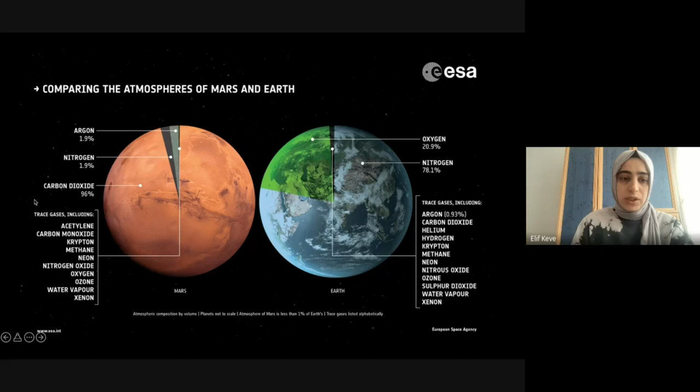As you can see, on Earth we don't have fully oxygen; the highest percentage is nitrogen, and oxygen is only 20%. Carbon dioxide on Earth is among the trace gases, along with other trace gases included in the breath we are taking. When we look at Mars, the highest percentage is carbon dioxide, and there is also nitrogen but in a smaller proportion. Argon is very similar to Earth. So the MOXIE project is about converting that carbon dioxide percentage into oxygen.

You know about the Perseverance rover, sent to Mars in 2020 and landed in 2021. It traveled on Mars to investigate the ground and materials, and research the existing ice and water. With this rover, there are two important parts: one is Ingenuity, the first flight on Mars, and the second is MOXIE, which we will talk about now.

MOXIE is the one that will work like a tree on Mars.

But here at the first landing to Mars with the MOXIE and Ingenuity, the MOXIE size is extremely small because it's kind of a test of this machine, to see if it works or not.

So what is MOXIE actually? MOXIE is an abbreviation of Mars Oxygen ISRU Experiment. ISRU is In Situ Resource Utilization. In dictionary description it says the ability to face difficulty with spirit and courage. MOXIE is a short, snappy name for a tool that helps lead to human footprint on Mars. It helps humans explore Mars by making oxygen. It works in situ, in place on the red planet, and is an experiment.

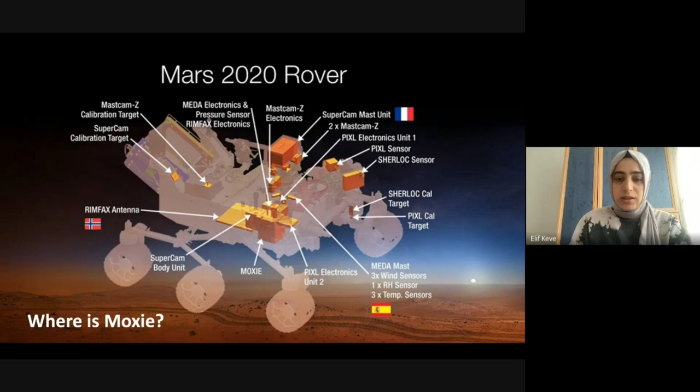I want to open up the details of the machine and show how it works, what kind of parts are included in it.

What are other duties of MOXIE? MOXIE is the smallest scale actually for now. It will be designed bigger for the next missions, and it will make more benefit on Mars. It is ingesting carbon dioxide from the atmosphere and producing propellant grade oxygen. MOXIE will make 6-10 grams of oxygen per hour, like a small tree, or about 50% of what you breathe.

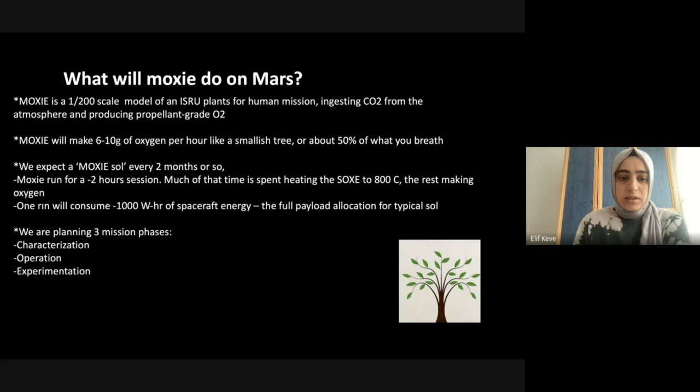Now coming into this machine, we have two very important parts that I will give detail about: the SOXE and the scroll pump, located in the sensor panel.

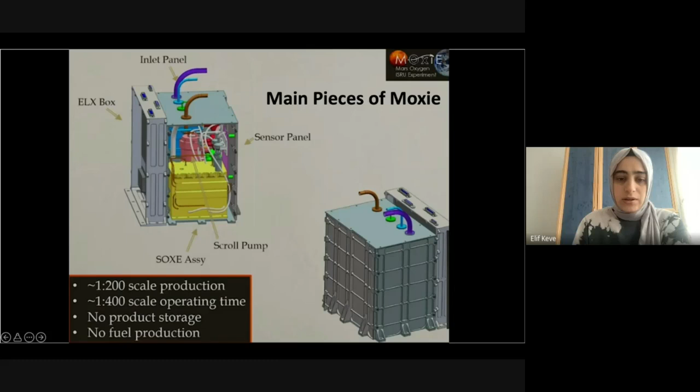As you can see here, this yellow box is SOXE, which is the entirety of it. And the pinkish color here is the scroll pump that is taking air from outside to inside for changing it. At the exterior view, it is spaced inside with two inlets for the outcome, and this part is taking the air inside. The scroll pump is placed here, and they are placed next to each other.

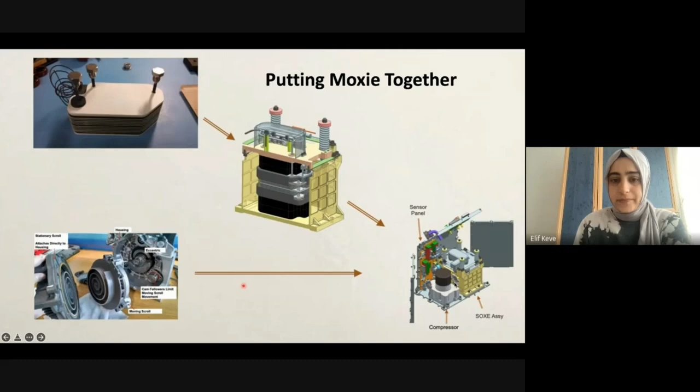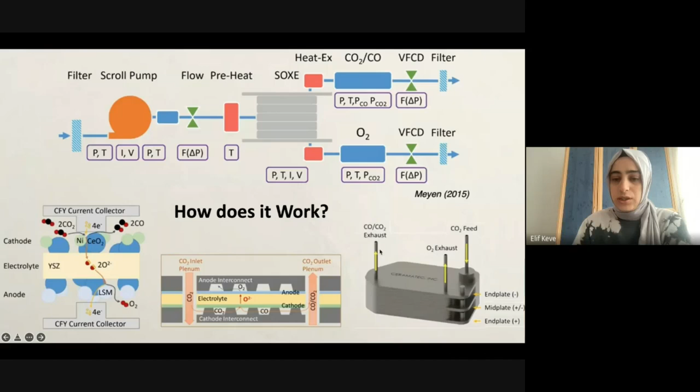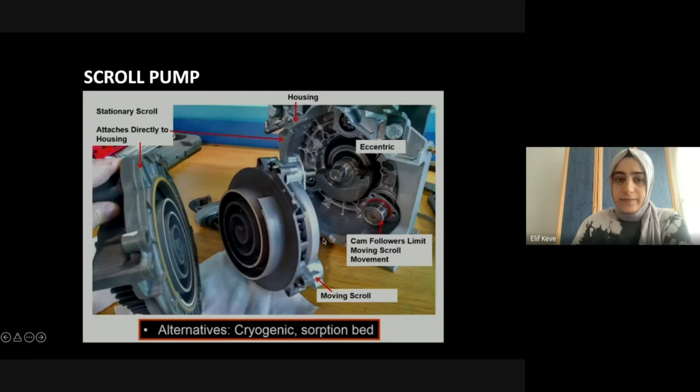Maybe this can show the simplest way how it works. There is a housing part here holding this piece, and a part that moves, a scroll that moves to take the air inside. This is the simplest way carbon dioxide in the air is taken inside to be divided into carbon monoxide and oxygen.

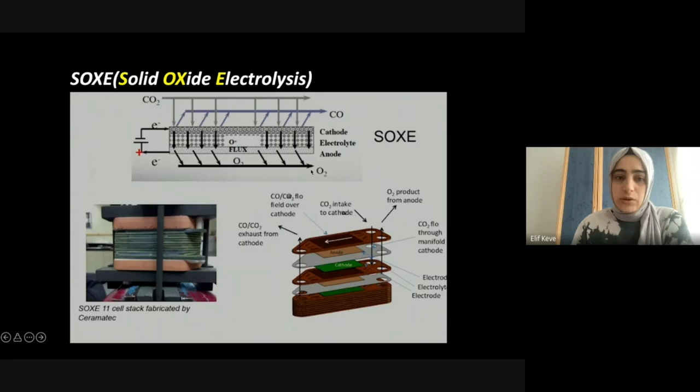And the simplest reaction is shown here. However, if it works like this, the benefit is usually half, because of the chemical reaction. When you take carbon dioxide, it will produce half the benefit in oxygen, unfortunately.

But the next project is the same concept, but the size of it is extremely different, scaled up. So the benefit given by the Mars 2020 project will be a kind of demo of the real size of the MOXIE. With this new scaled MOXIE, we are going to get more benefit, like a small forest rather than a tree.

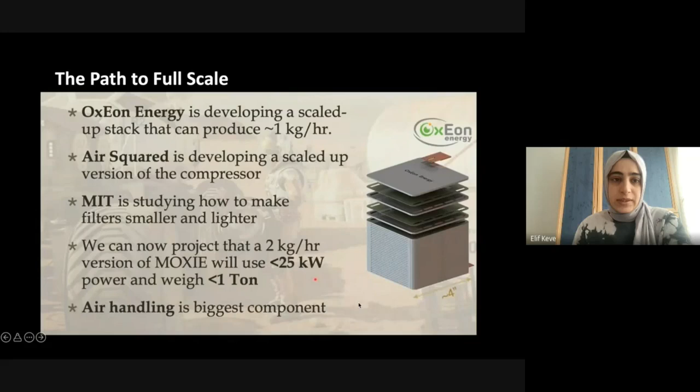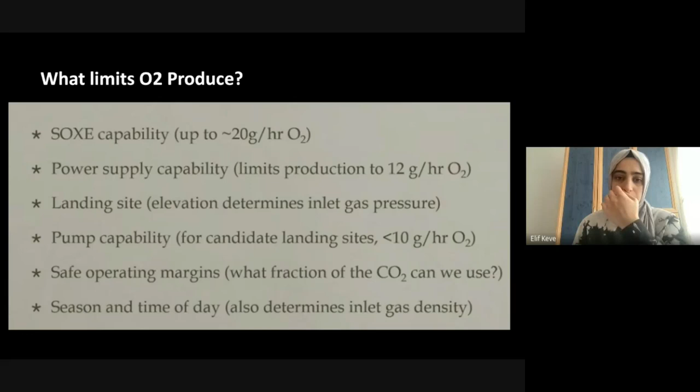There are some limits on oxygen production, because it's not possible to use all the energy of the machine only for fully producing oxygen. There are also inherent capability limits. SOXE capability is up to 20 grams per hour of oxygen it can produce.

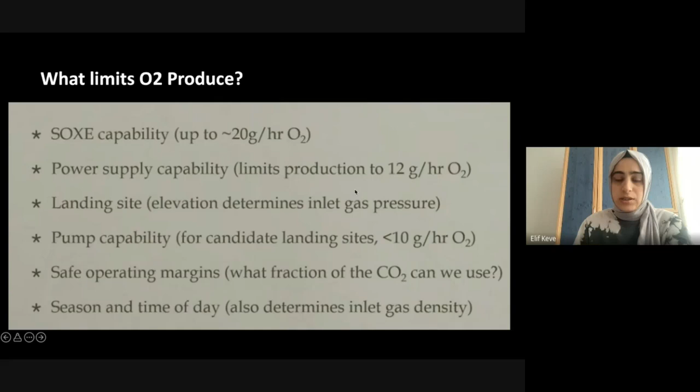Power supply capability is also one of the different factors involved. And here it explains the differences over time, because the machine works differently in summer nights versus summer mornings, and according to different seasons or temperatures.

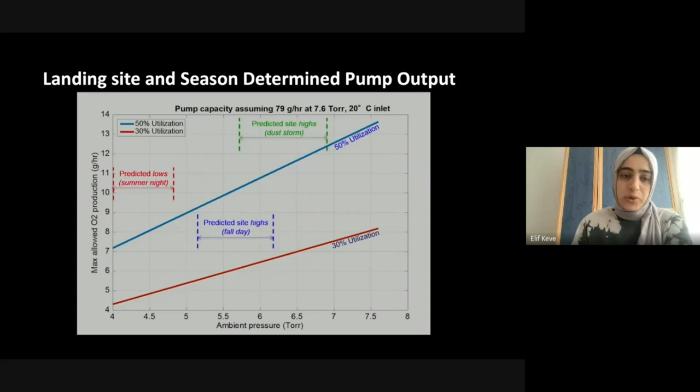I would like to give some examples of space architecture projects after this. So we are learning how we will go to the moon first with the Artemis project, to make it the first and highest analog area to simulate life in outer space. Then after Artemis 2, we will land on Mars. And what we have to solve is oxygen, to return and to breathe.

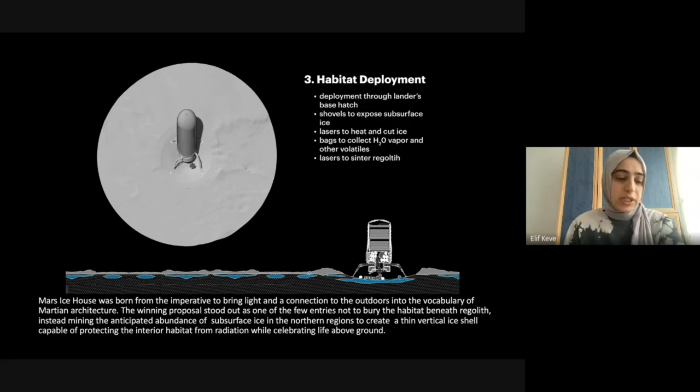As you can see in this small demo and animation, firstly there will be a descent and landing to the ground, and the habitat will be deployed.

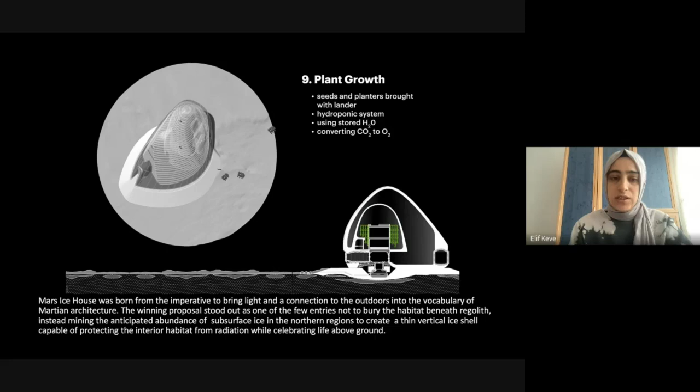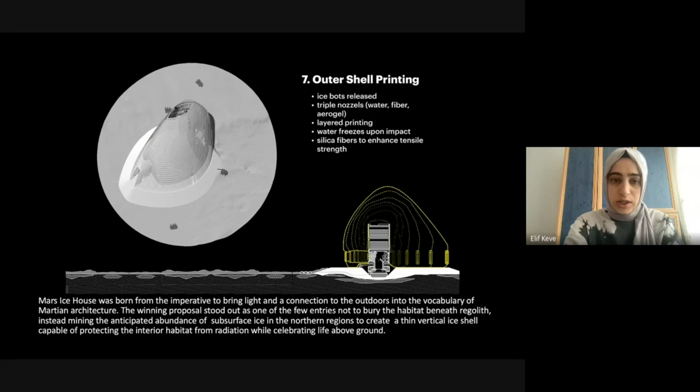Then, as the exterior shell and interior shell are made of ice and ETFE translucent material, it should find H2O, which is water, ice, underground. So there are different machines working on the construction of this building. One of them is very important for this part: finding ice and water underground.

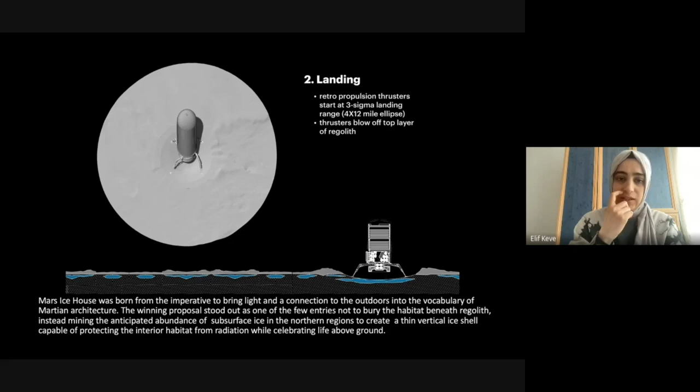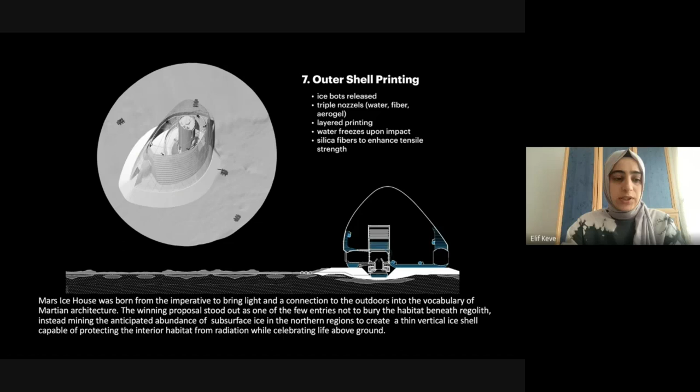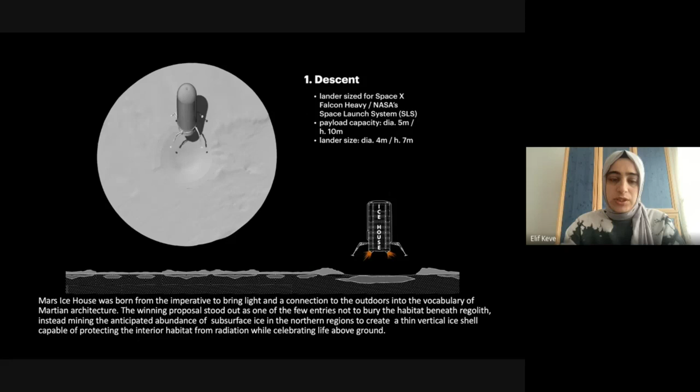I will give more details about these machine robots, how they work, what they do. Finally, after having the source of ice and water, the foundation will be sintered, and ETFE membranes will be inflated. The second important robot is for printing the shell, the outer shell and inner shell as well.

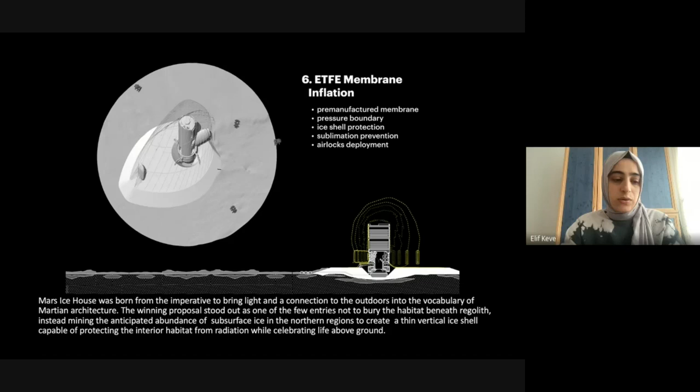And then the plants are growing. If the plants grow very well, it shows that life will be possible here, so a human can be ready to arrive at the place. After the plants' growth, the crew will arrive.

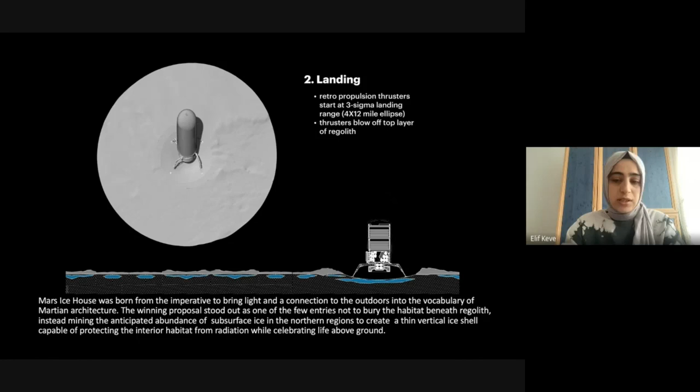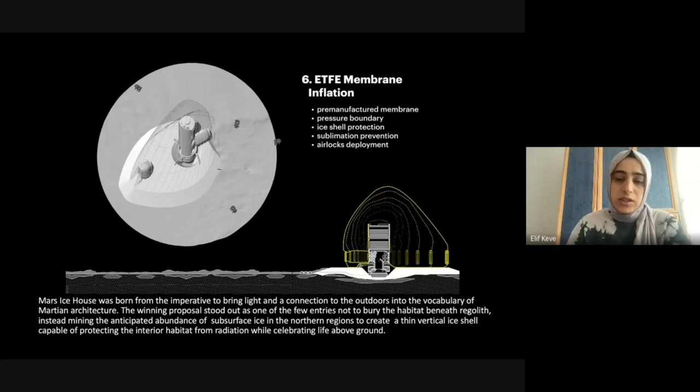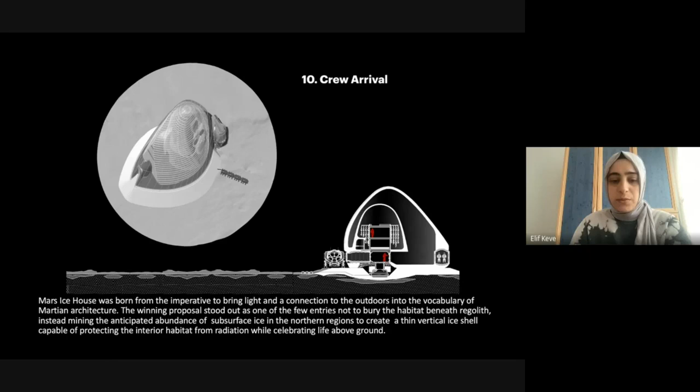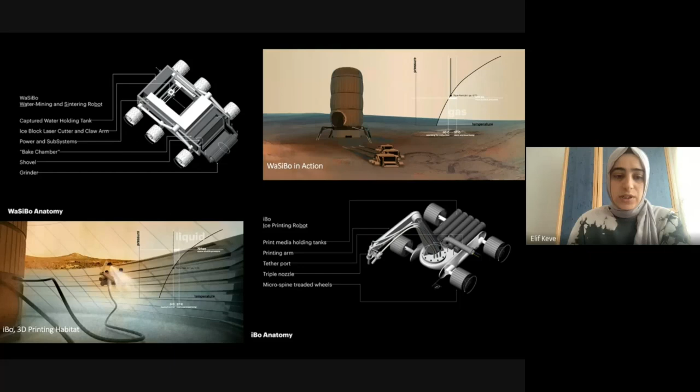WaSiBo is the machine that will first research places with water and ice, which will be used in this construction of the first habitat. iBo is the 3D printing machine that will be used for the exterior and interior, shown here in a small picture.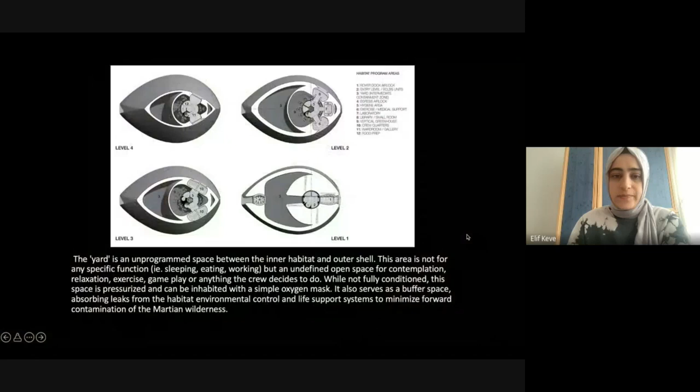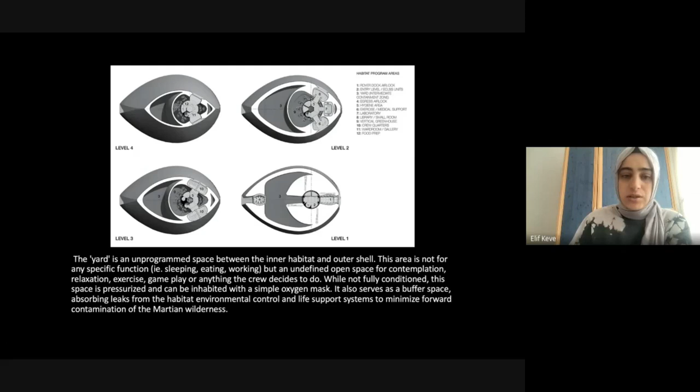Here you can see better how it works. It's climbing and 3D printing the interior and exterior, because this project is double shielded. Due to this double shielding, the exterior part, the yard, is partially protected, but the interior part is extremely protected from all hazards, radiation, and other dangers.

Another important point is this part, the airlock. We have to have airlocks at every project. That is a crucial, very significant point we have to think about, because it will protect humans from passing outside to inside.

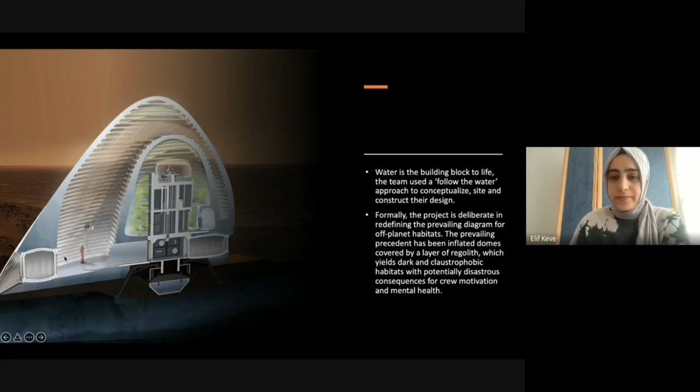The second important project of the SEArch+ group is Mars X House. Mars X House has two different versions, version 1 and version 2. First I want to talk about version 1. This is one of the prize winners of NASA's Phase 3 Habitat Challenge, and in this project there are two different parts that are actually connected to each other.

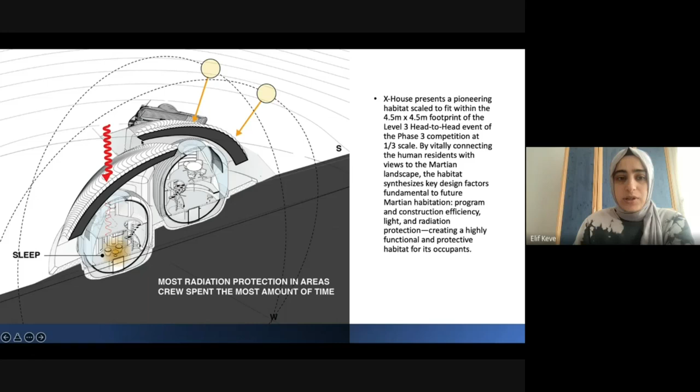In this project, the concept is about how to bring in horizontal light, but not direct light, because the direct vertical sun rays are very dangerous for humans. That's why they are making small openings to take horizontal light inside.

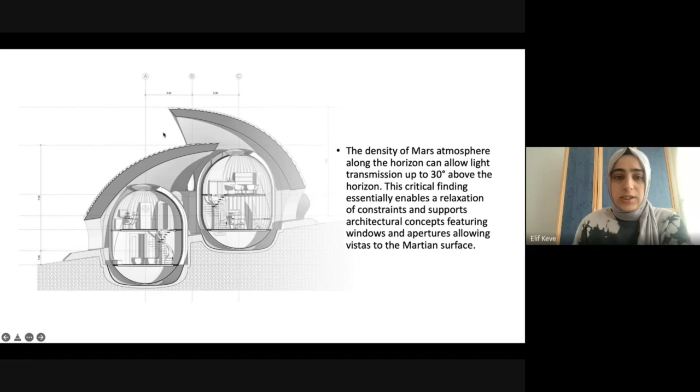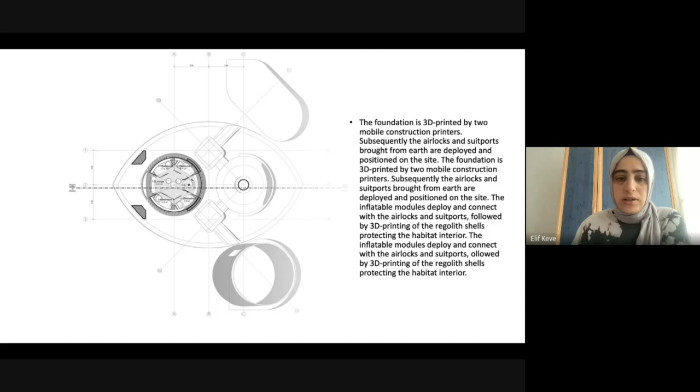They made this opening by creating two parts with two levels, so in this case they can cover both of them while taking horizontal light inside. As you can see here, the two parts are connected to each other, with all needed parts.

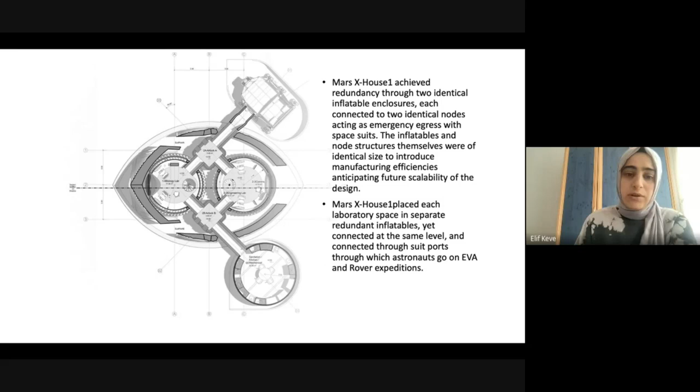Looking at the plans of the Mars or Moon projects, there are some small differences from life on Earth. They are extremely focused on how to live in small spaces and how to make them larger through multi-use and flexible usage. They also care about gym and sport areas, and each house has its own plant growth section to make a sustainable living.

Version 2 is also named Mars X House. It is one of the first prizes of NASA Phase 3 again, the 3D printing habitat competition in 2018 and 2019.

In this project as well, as I said, before humans arrive, all the robotics will construct this building. With this shape, they're mostly addressing the concept of protecting from exterior winds and outside forces, because Mars has high winds that can damage structures.

Yesterday one of our friends asked how high we can go. I will explain more about this at the next project, but here too they are trying to make the highest construction possible.

Here, making it curved, as I said, makes it resistant to exterior forces, and all the loads are included in this part. This part is storage for water, and it's heavy. So you can think of two curved parts with the pressure of the high mass on top, which makes the project strong enough to survive longer.

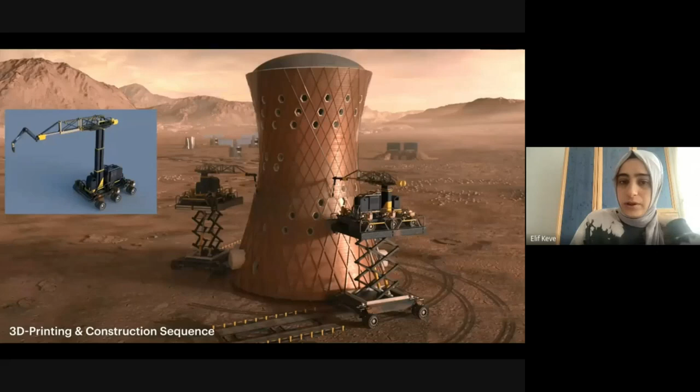The nice part here is the openings, which take biomimicry from the bee cells of honeycombs. The hexagonal shape is one of the perfect shapes that can make the biggest surface with the lowest edges. You can see a small animation of how the levels are constructed and what the steps are.

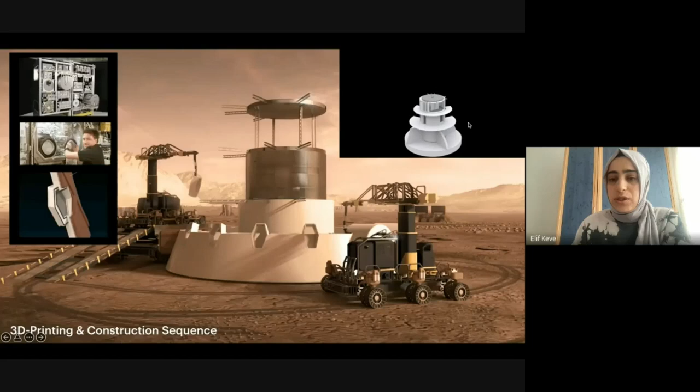Initially, after the foundation is constructed, the construction parts will be placed and 3D printing machines will print the rooms, divisions, and levels.

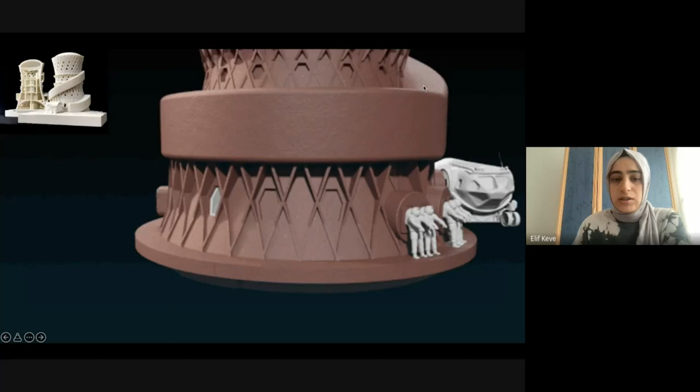After seeing the interior construction, you can see outside details here. As you can see, they have different levels from the exterior to interior. Regolith concrete covers the exterior, however the regolith, the material of Mars, is toxic material.

It's not very healthy for humans to touch this ground; it contains toxic material for human skin. That's why they usually cover it with different interior shells. Also, for making it strong, basalt fiber is used, so it's double shelled inside for protecting humans from the toxic regolith concrete.

The base is made of HDPE material, and finally the window is a piece of assembly made using a hexagon super shape.

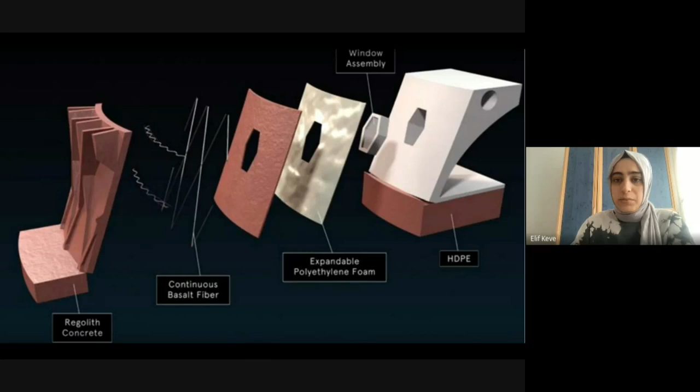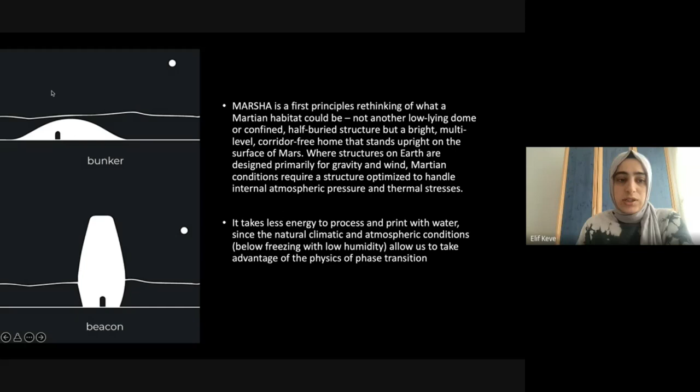MARSHA, that is the project I wanted to talk about. The concept is the answer to our friend's question from yesterday: how we can make the living habitable area higher than the normal concept, which is always used to make small domes to protect from radiation by going underground. These were the initial project ideas, but this new concept comes up against that first concept.

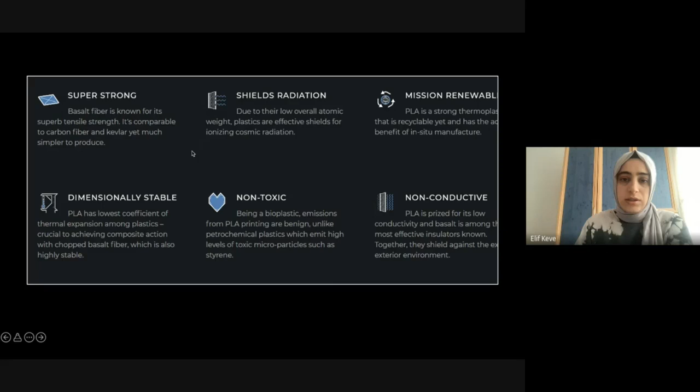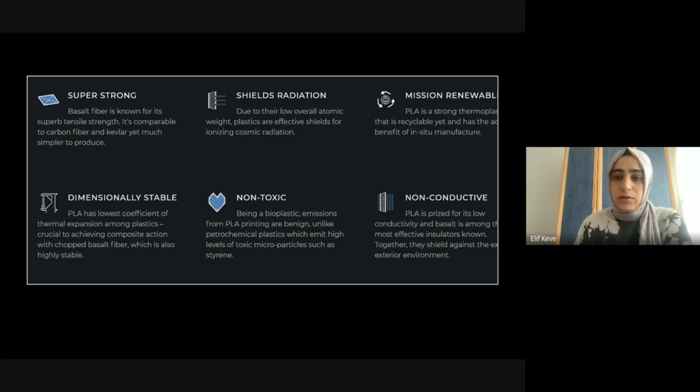This structure, this building, has different very important features. It is super strong and shields radiation. It's also double shielded, double coverage - in any case we have to protect humans from the toxic regolith of Mars. And it is renewable, and as seen here, no toxic material is included.

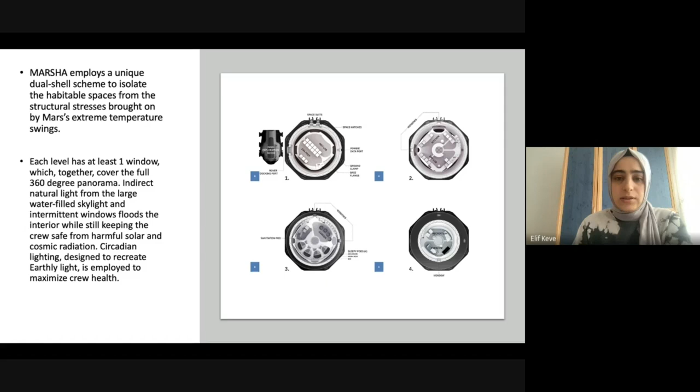We can see some design and planning details here, some renderings. Mars Incubator is one extremely different project from the previous one - all 3D printed habitats. These are extremely different than the others. As I said, they combine with each other in the space by these corner connections, so it includes a lot of hexagons and pentagons.

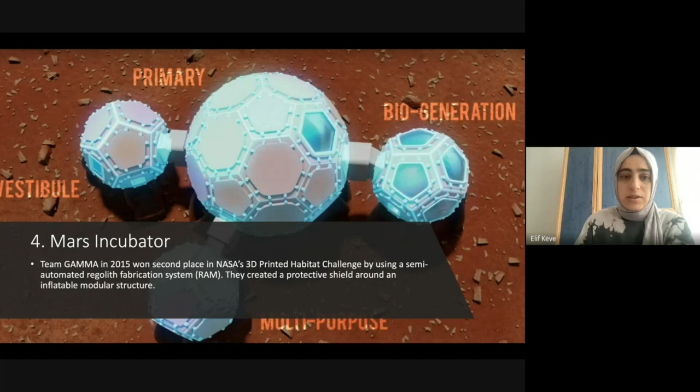Some of these are opening for lights inside with a transparent material. And the last project will be about Hassel Studio.

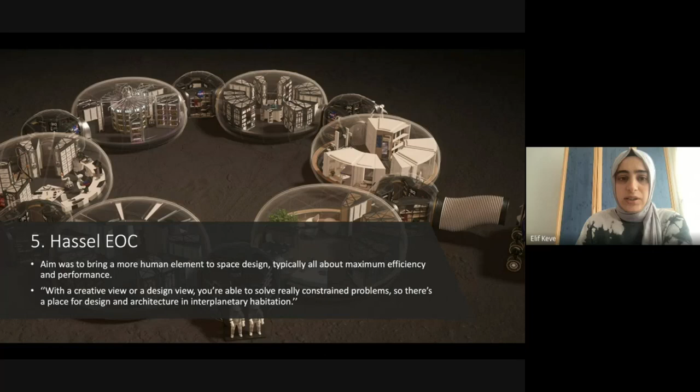It's EOC. It includes two parts actually in the construction: 3D printing for the exterior, and the inside will be inflatable parts. This is the exterior shell with the 3D printing, and with this part, even if there is no connection, it can make the interior completely protected from the exterior regolith.

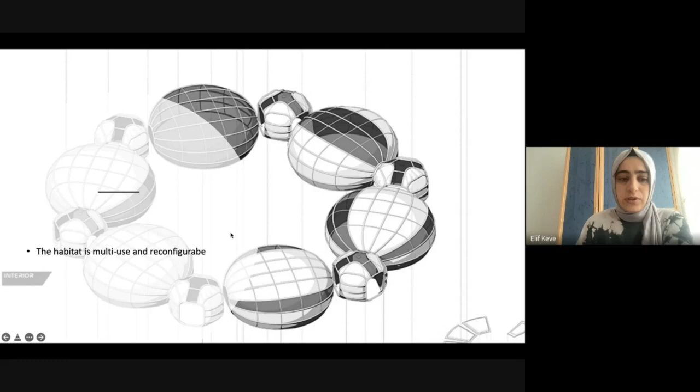This part is the inflatable part. It has all connections from each other and is designed for all the needed parts. It can be inflatable, connected from this part, and inflated inside, under the underground, under the regolith.

In this part, we can see that all the pieces serve different needs. As I said, all the habitats need a research area and a green part to produce our own food for a sustainable life. They also include different parts like a workshop, which may be very useful for long stays in the future.

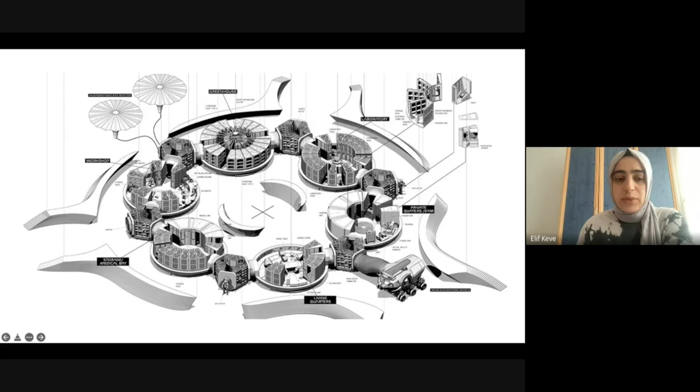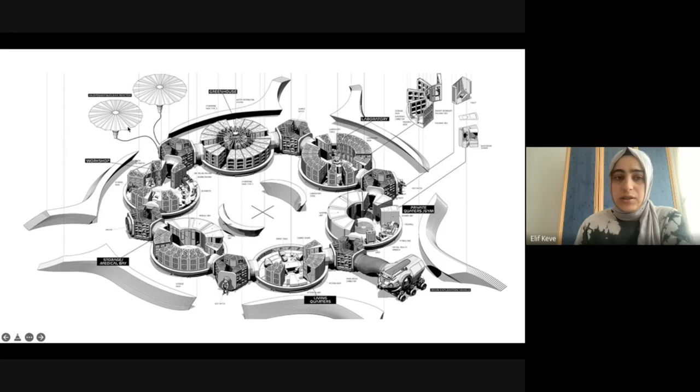The medical part, greenhouse, laboratory and living area are very important and crucial points we have to place in all the projects, and all systems should work eco-friendly and sustainably, producing their own energy from the sun.